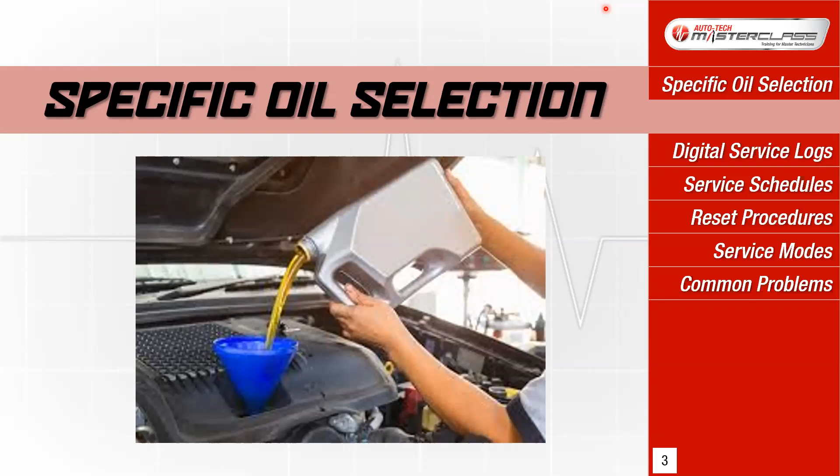Let's get cracking. In this webinar, we're covering two topics. The first one is specific oil selection. As we all know, that old adage we all grew up with on TV commercials - oils ain't oils. We'll explain why one oil does not do every vehicle anymore. We'll discuss all the different standards, classifications and specifications, and also the future of oil technology. Things are changing in regards to the base stock, the key ingredient used to make engine oil. After that, we're going to discuss the other new trend some of us may have seen already - the inception of the digital service logbook.

On a lot of cars now, and more so in the future, no more service book in the glove box to stamp and fill out when we've completed the service. Now the logbook is theoretically stored on a database at the manufacturer. So what can we do about the digital logbook? Us private workshops, can we fill them out? What is the procedure to do so? Things like that will help you out there as well.

All right, so let's get cracking and let's look at the first topic, specific oil selection. Why are there so many different oil specifications out there nowadays? Let's have a good look at this. The first thing I want to clarify for you guys are two popular terms that we commonly see when we're going to a lube guide to work out what type of oil we're putting in this car today.

What we normally see on the lube guide is firstly the recommended oil. This is the oil that the vehicle manufacturer is recommending for us to put in that engine. As technicians, we would safely assume that if the manufacturer is recommending that specification, that viscosity oil, this must be the right oil for the engine to perform at its peak performance, kick out clean emissions, give good fuel consumption figures.

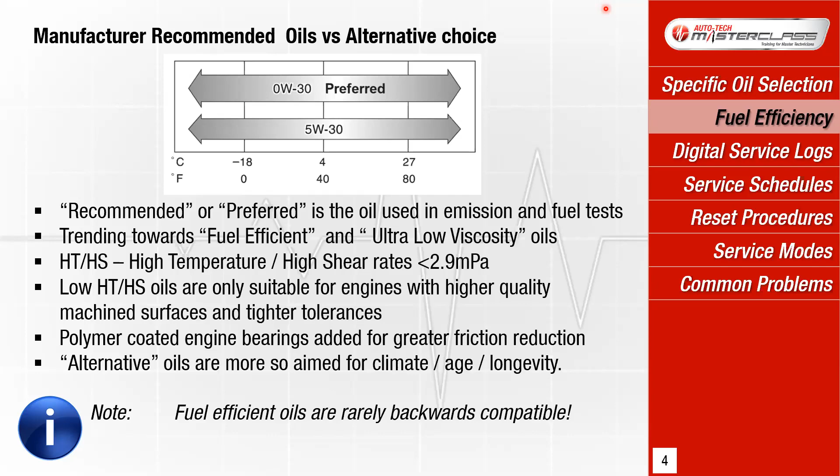Now, who actually controls oil around the world? Well, there is a committee that's in charge of this, and they are the EOLCS, the Engine Oil Licensing and Certification System. The good thing of having a committee controlling all the worldwide standards, and even the new trend, the ever-emerging manufacturer-specific oil standards, is they test every oil standard around the world, and they test them all the same way with the standard test.

The good thing about testing them the same way is it enables everyone to clearly see the comparative differences between all the standards of oil. Now, this was highlighted more so many years ago when manufacturers and technicians around the world discovered that a particular oil is good as a standard for particular areas around the world. But when that oil is specified for the same car in another country, due to different driving styles, driving conditions, and different ambient temperatures, that international spec oil actually doesn't do the right job in regards to engine protection where the climate is different from the original country.

So that's why the EOLCS was developed, in order to see if that oil standard, which is good for one continent, is okay for another continent. And if not, manufacturers had to adjust accordingly, so things work the way they should. It's a very good thing. So it keeps oil makers under control, keeps some standards in check, and it makes life a whole lot easier for us to compare one classification of oil against another, to ensure that we're actually putting the right oil in that car at every service.

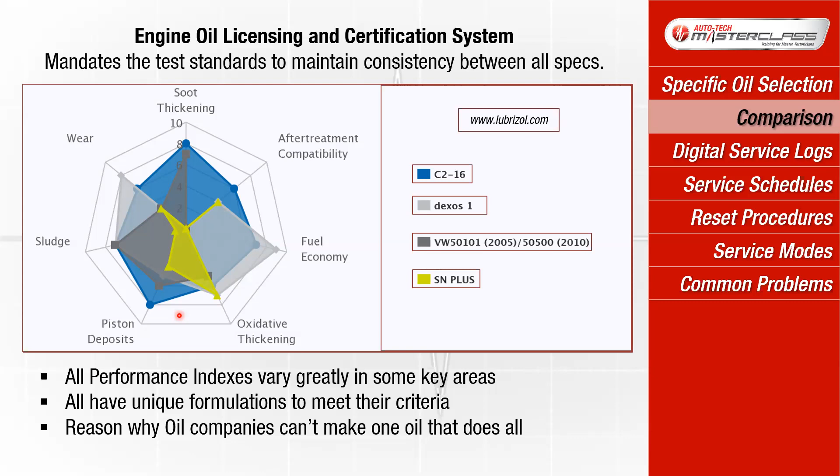All right, now let's have a look at all the different international oil standards around the world and the governing standards as well. I think the most important thing, as far as we're concerned in regards to engine oils, are the viscosity ratings. As we know, there's the two numbers, the low temperature and the high temperature rate.

So firstly, let's look at who created the standard, and that was the good old Society of Automotive Engineers. Many, many years ago they created the standards of engine oil viscosity. Basically, they create a certain thickness of oil and then they label it - this is a 0W, and then they make another batch of oil and say this is a 10W, this is a 20, this is a 40, and so forth.

By creating this standard, everyone that makes engine oil cannot deviate from these viscosity specifications. So it stops anyone out there from making a different oil which might be thinner or thicker, but then calling it their version of a 0W. So all viscosity is the same, no matter what label or brand it is on the bottle. So that's good, keeps everyone in check, makes our life just a little bit easier.

What they also dictated are the allowable viscosity grades for both low and high temperatures. So firstly, let's look at that first number, the low temperature viscosity grades, where the SAE mandated that you can't go any thinner than 0, and you can go up in 5 increments all the way up to 25W. That's the first number. The second number is the high temperature viscosity grades, where they say you start at a minimum of 20, going up in increments of 10 all the way up to 60.

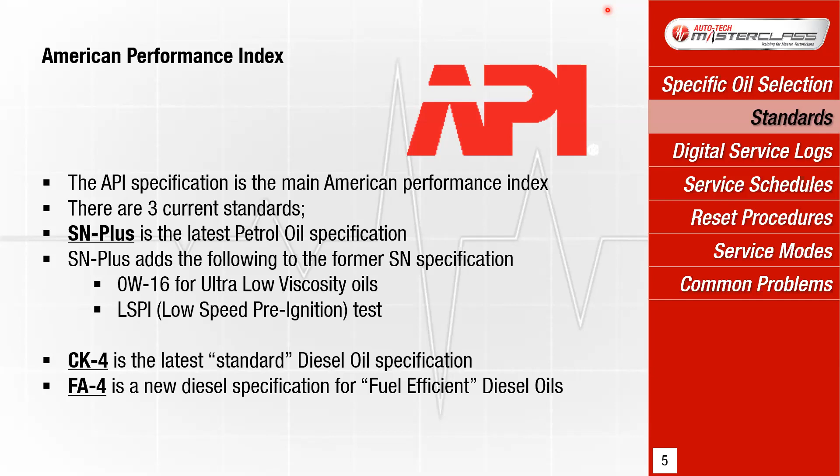You wouldn't be putting FA4 in a pre-1990 diesel. It's just way too thin. It's just not going to work on that type of engine. And the formulation, there'll be some key ingredients that might be lacking, which makes it not suitable for the older stuff.

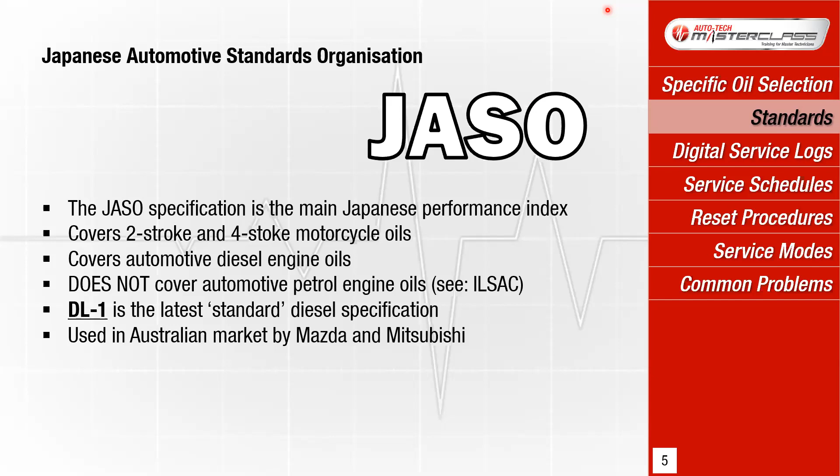All right, let's move over to Japan, where Japan had been using JASO as their performance index for many years, but not so much nowadays. Nowadays, JASO, which is just for Japanese diesels, not Japanese petrol engines, is now only a performance index specified by Mazda and Mitsubishi. The other Japanese car makers have moved over to another well-known performance index. So for Mazda and Mitsubishi currently, DL1 is normally the recommended performance index on a lot of their diesel vehicles that you need to abide by when choosing an oil for them. So not many manufacturers use JASO as their benchmark anymore.

Now let's move over to ILSAC. ILSAC came out back in 1998. I remember being a technician back then, and all this talk came out: here's a new oil grade, this is what it's all about. Basically, what ILSAC is and why it was developed - it's a joint collaboration between the Japanese and American car industries.

Because what was happening in the 80s and early 90s, especially with a lot of Japanese imported vehicles going into the American market - because the Japanese had one performance index and the Americans had their own performance index - some technicians didn't look at the classifications or their lube guides too well, and they were putting American spec oil in Japanese cars. It wasn't suitable. It was causing a lot of Japanese vehicle engine problems, customer dissatisfaction, warranty claims on those brands, and it really hurt sales. To a certain effect it was happening the other way around too, because some American cars ended up on Japanese roads as well, and Japanese techs were doing the same thing, putting the wrong oil in.

So they got together and said, can we have a blanket petrol engine standard - ILSAC is only for petrol - that works for both of us and prevents any more confusion? So that's what they did, and that's why ILSAC was created. The latest ILSAC petrol oil specification is GF5, a very popular spec, recommended by a lot of manufacturers, especially GM cars that we've seen over here in Australia.

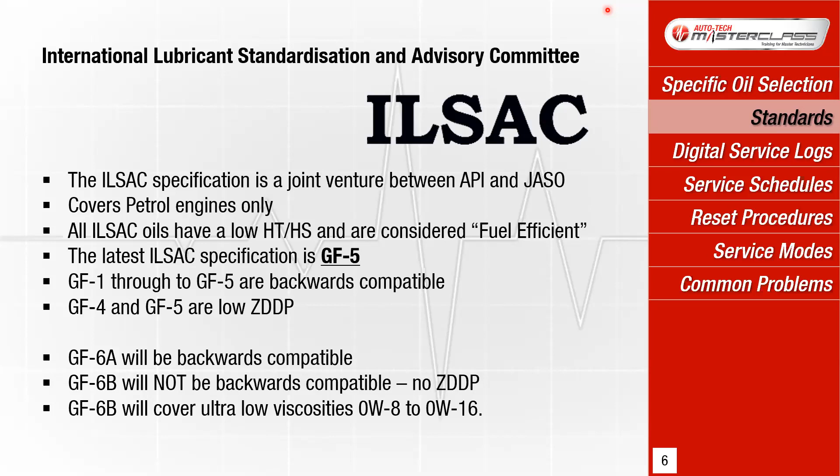The other different thing about 6B is it's also going to encompass ultra low viscosity oil, 0W4, 0W8, 0W16, all those sort of things. So everything running GF6B onwards will definitely have a roller valve train in that area, because there is no zinc left. So that's happening very soon, this change. You'll start seeing it very shortly in your workshops and your lube guides.

All right, let's move over to ACEA. This is an oil specification that originated from Europe and has been highly regarded and used over there by many European car makers, and now some Japanese car makers as well.

If they're not using ILSAC and they've moved away from JASO, they're using ACEA as their benchmark. Now, we've used ACEA oils a lot already, I can presume, via manufacturer cars that this spec covers. And we've always seen these letters and numbers after the ACEA oil grade. So what do these mean? Well, it breaks the ACEA oils into four different groups.

So if you see it's an ACEA A engine, that is a petrol engine oil, older petrol engine oil. ACEA B oils are for light duty diesel engines pre-DPF. ACEA C oils are for petrol and diesel engines with a catalytic converter, so 1986 onwards, and a diesel engine with a DPF, so it's a lower ash oil, which these devices mandate.

E is for heavy duty diesel engines, so for truck engines. But in saying that, it's also Isuzu D-Max, it's an ACEA E oil they recommend. Why? Because Isuzu make trucks, and they just carried over their truck oil viscosity knowledge over to their light commercial ute as well, and it is DPF compatible at this stage. So that's what the letters mean, breaks it down into four groups, tells us exactly what type of engines it's suitable for.

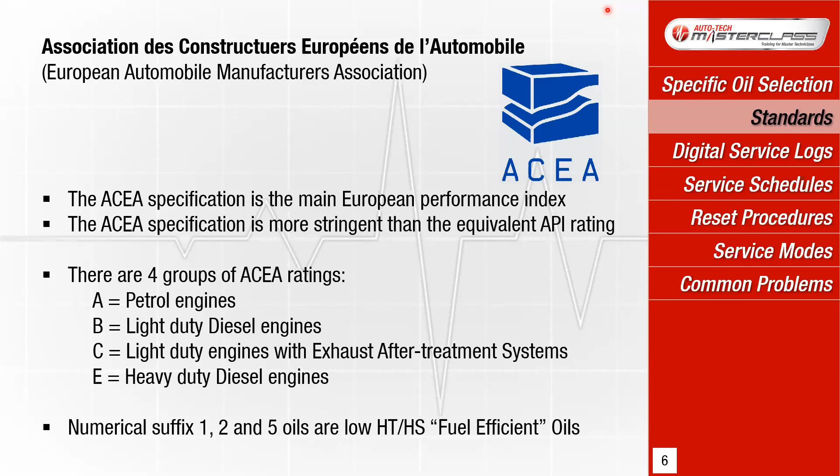So if it's not a 1, 2, or 5 oil grade, then it's a slightly thicker viscosity, mainly for the older vehicles out there. That's one quick rule of thumb that you can use in this particular area.

Okay, so that's the international standards that we've seen in use, where they've originated from, and what is the current standard out there. But what we've seen, guys, is various car makers move away from those international standards and create an oil classification of their own, manufacturer-specific oil specifications. Why are they doing that? I'll explain very shortly. These manufacturers, like Volkswagen over the years, GM when they brought out Dexos, Ford's doing it, other manufacturers are doing it. If not, they're going to do it for sure.

Basically, they look at the engine oil classifications available out there, all those international ones, and they look at the formulation and they say, yep, it's not bad, it's close, but it's not perfect. It's not ideal for our engines because of the metals we use, the anti-frictional coatings, the plastics inside the engines as well. That's important nowadays. We want a different chemical, a slightly different formulation from what is currently out there.

So what they do is go to the oil manufacturer that they use and say, yep, we like this particular grade of oil, but can you add a bit of this and reduce a bit of that in the formulation? So it's a custom oil blend that the manufacturer wants. Now the oil maker would be obliging because they get the business from that car maker. So they will play around with things, add some ingredients, take some ingredients out, and now it's a slightly different oil, this custom blend. And because it's slightly different from one of these international specs currently out there, the manufacturer gives it their own manufacturer-specified classification. So yes, that's where it comes from.

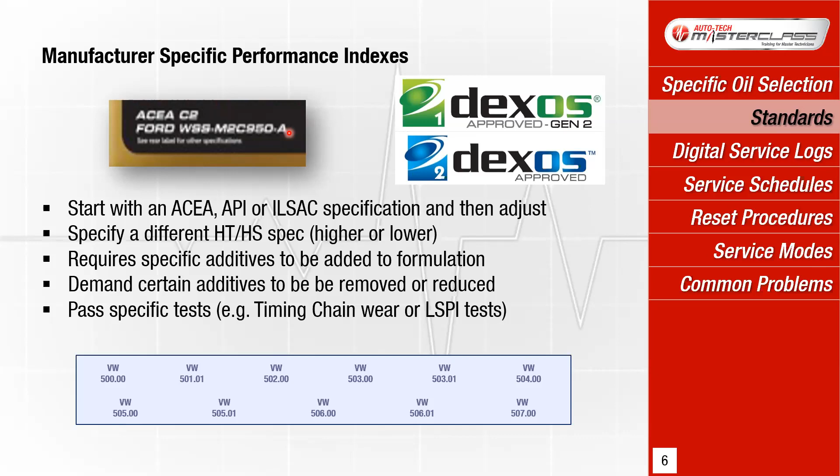What the manufacturer also wants, and the reason why they want specific additives added or removed, is because they're worried about timing chain life. So they might want some key ingredients added to make that timing chain last a little bit longer. And also for some other wear tests, such as LSPI, low speed pre-ignition - does it stop that? Add or take some chemicals out for that as well, which I'll talk about very shortly. So that's why we're starting to see the emergence of manufacturer-specific oil. It's the perfect oil blend to suit their engines for what they want it to do, and help this engine last the warranty period at the end of the day.

So let's talk about something I've been harping on a little bit, low-speed pre-ignition. This turned out to be a very big problem for today's high-tech petrol engines. It started rearing its head in the late 2000s, about 2008, 2009. That's when we started seeing more and more downsized efficiency engines - small petrol engines, small capacity, 3 or 4-cylinder engines with direct petrol injection and supercharging on top, whether it's a supercharger or turbocharger, forced induction system I should say. So highly stressed engines, and you've probably seen them over the years.

Volkswagen was very notorious for this. A lot of these engines very early in the piece were basically blowing up, exploding. So failed engines going back to the manufacturer or back to our workshops, and normally piston failure was discovered when they dismantled the engines - broken ring lands, broken piston rings, cracked pistons as well. All these things were surfacing. So because it was happening a lot, and a lot of unhappy customers, a lot of warranty claims, fights in the courts, things like that, car makers had to sort of work out what the hell was going on here. We designed this engine, it should be right, but things are going wrong.

So firstly, car makers were blaming car owners for not using the right octane fuel, which could be valid to a certain extent. But when they went back and did further testing of these engines, they realized there was another problem occurring: low speed pre-ignition.

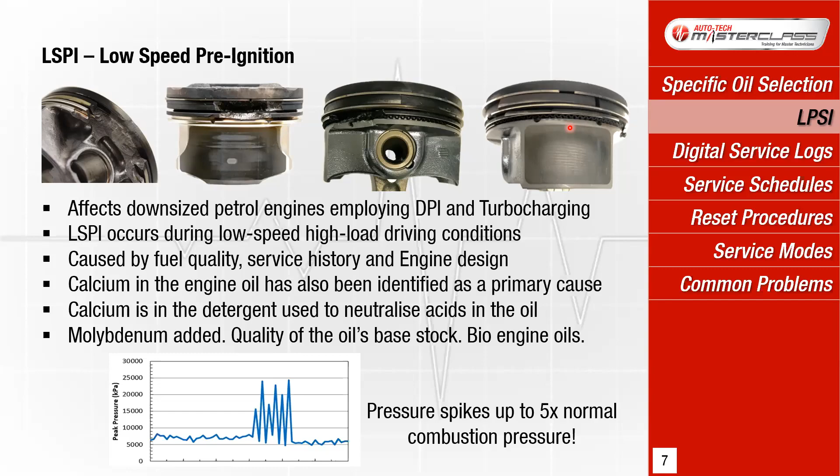All right, so that's enough about specific oil selection. Hopefully that explains a few things, a few questions you may have had about why there are so many different oils, why there are so many different grades. Hopefully that's a whole lot clearer for you guys.

Okay, so now let's move on to the digital service logbook. You may have come across this already - a customer drops off the car, and what we normally do is go to the car with the job card, write down the mileage off the odometer, and reach in that glove box to get the book.

And now there's going to be even more reasons why that book is missing sometimes, because nowadays some cars didn't come out with a book, plain and simple. Manufacturers have worked out over the years to save paper, save the forests, save manufacturing costs and printing. Let's just do away with the service book.

And now the service history we'll just keep on our database at the main office, where the dealerships can just plug in, connect to the database and fill it in when they do a service. And that's where it's trending. Some manufacturers are already doing it in Australia, has been done overseas for quite a few years already, and there's going to be more and more manufacturers going to the digital logbook.

So let's look at the history and the inception of the digital logbook. Believe it or not, the first manufacturer to give it a go was Mazda back in 2006 when they brought out their digital service record, no more book in the car. At this time and at this date, not in Australian vehicles yet.

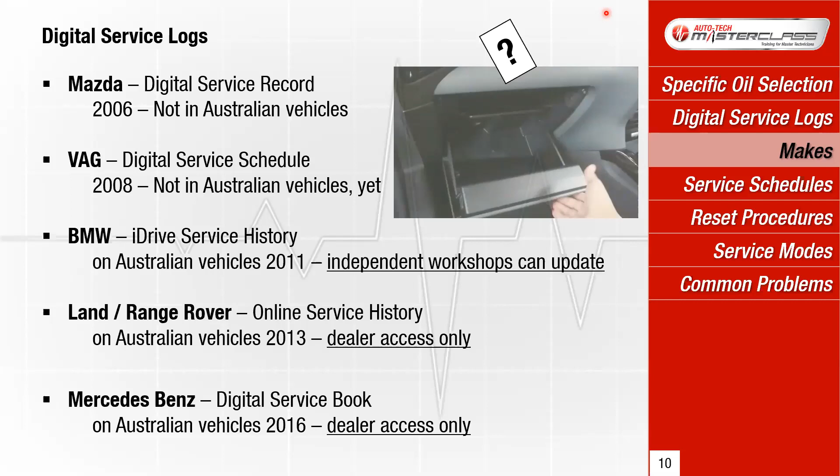So what do us technicians do in the private workshop land when it comes to providing some sort of authentication or proof of service for our customers if we're not in the dealership? Well, let's look at one brand, because there is one brand that we currently do have access with in Australia. One brand has let us in, which is great, and that is BMW, their iDrive service history, where independent workshops can access this database. Not every brand is letting us in yet because we haven't got those freedom of information laws that other continents do around the world.

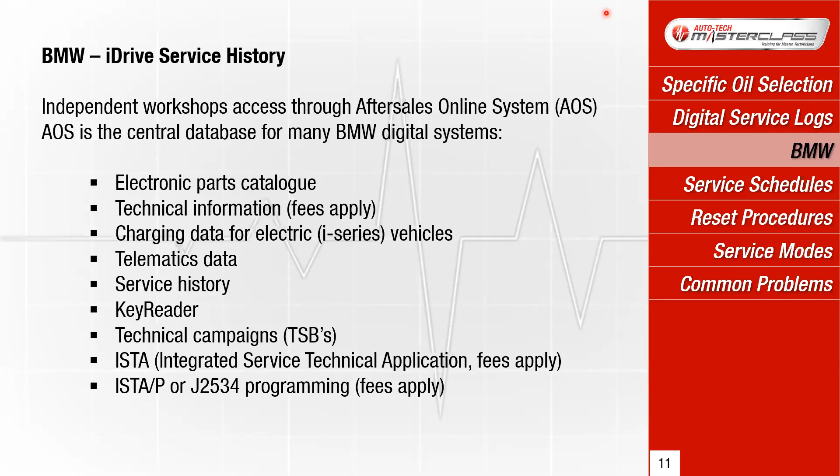So what do you need to do? You have to go to the BMW AOS website, which is the after sales online system. And here it is here, guys.

Now, the good thing is, guys, this is free. We don't have to pay any money to a certain extent. But if you've never done it, this is what you do.

Step one, if you just serviced the BMW and it's got iDrive service history and you want to fill it out, the first thing you need to do is become a BMW service agent. Now, it's no big title or anything, basically you have to go on the AOS website. Here's the BMW AOS website. And not only BMW, but all the brands that fly under the BMW banner nowadays, like Mini and Rolls-Royce and their motorcycles as well. So here's the homepage for the AOS.

Go on there and click on here and just enroll yourself as a registered service agent. So you go in there, what country you're in, business name, ABN number, proof of business ownership, so your business certificate, your ASIC form to show that you're a business owner and a trader and things like that. Phone number, email address, website if you got it, all that stuff. Fill that all out, submit it.

Costs nothing, guys, it's free, just a bit of time. And within 48 hours, BMW get back to you and say yes, congratulations, here's your BMW service agent number. So everyone gets their own agent number. Sometimes they might not let you in straight away, they might want some extra supporting information, but keep doing it. It's free, and now you've got your own service agent number.

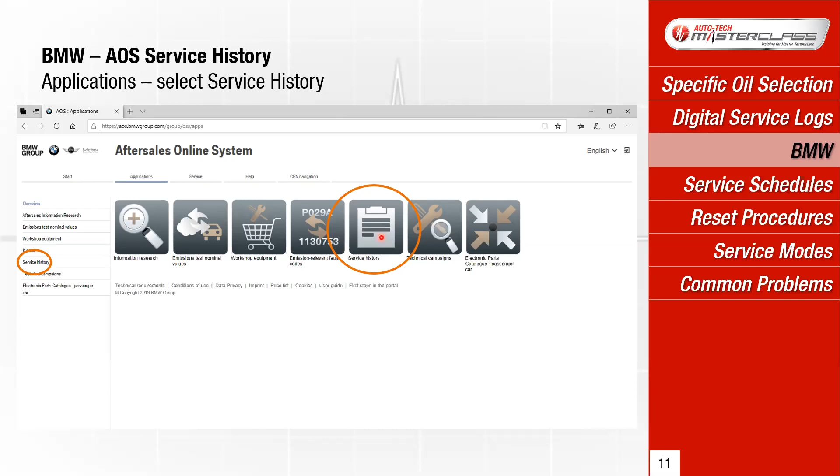Once you're in, you can start looking at the service history and filling in the logbook, which is great. So when it comes to service history, click on the next page, service and service history, click on there. And here's an example, what we've got here, we've got a 2011 BMW 520D.

So let's say your customer came in and you wanted to see what is the service history, what has been done, what hasn't been done on this car in the past. First time customer maybe. So now you're registered, you're in, punch in the VIN number there and bang, the car comes up if it has got a service history recorded to it. So on this particular vehicle, this 520D, we can see here is the digital logbook. Here's the service history showing the date, the mileage, and who serviced this vehicle. And as you can see, it was done by BMW dealers in Melbourne before coming to us. So that is the digital logbook, so to speak.

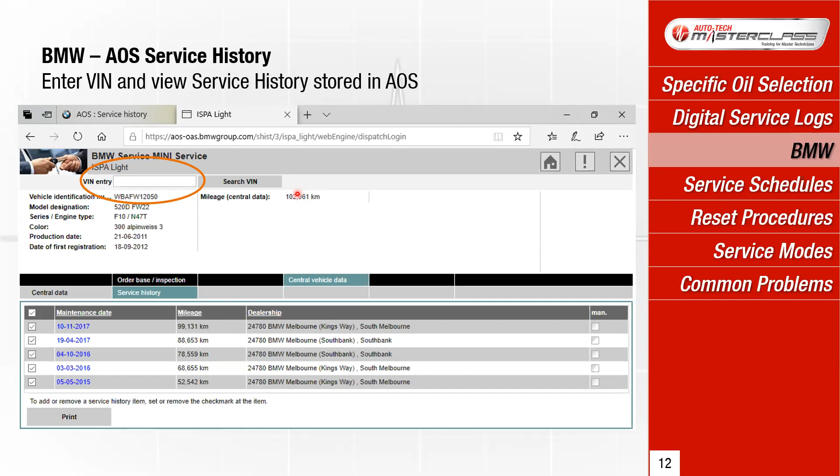Now, if you want to see what was actually done on those services, you click on them and it tells us everything. What's interesting, last time the vehicle was at a dealership or recorded or hooked up to AOS was 102,000, so it was after that service. Went in for wiper blades, went in for a recall, went in for brake pads, who knows, but it wasn't a service, that's why it's not there. But BMW will have that information on a different database.

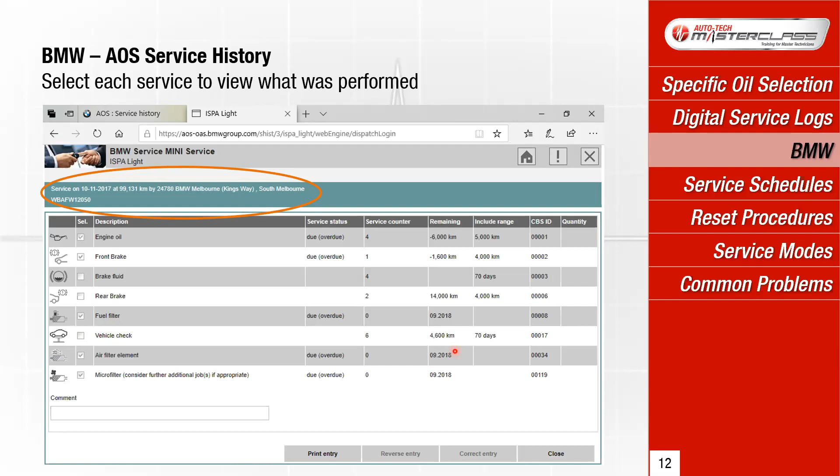All right, so if you want to see exactly what was done, you click on one service at a time and view it, and what has been ticked is basically what was done. And you can see on that last service at 99,000 Ks that this dealer did, they did the oil, they did the front brake pads, they did the fuel filter, air filter, and the cabin filter. What was the status of it when it came in? Was it due, overdue? How much over was it, or how much was left before it was actually serviced? All that sort of stuff. So we can see a whole lot about the history there. And so you can look at them one by one and ascertain the service history.

And that is the AOS database. Once again, you've looked at all that, you've worked that all out, you haven't paid a cent yet, just a bit of time going on that internet site.

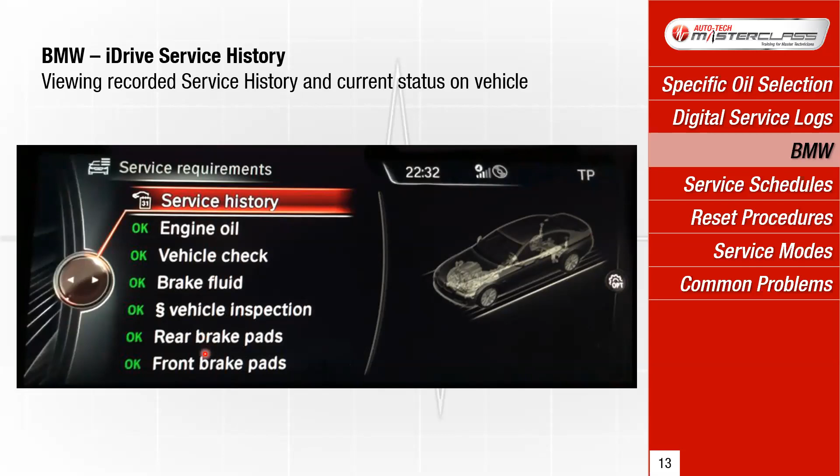But what you can also see, if you click on that, you can also see the service history. So this is a different BMW vehicle, and yes, the service history has been downloaded to the vehicle as well, not only on AOS, but on the car as well, showing the date and mileage.

The service agent - the fact that it says BMW here means it was a BMW dealer. If it was a private workshop, it just says 'other.' Sometimes it depends how you filled it out, or when in time you logged into AOS and became a service agent, it may show your business name as well. They keep changing what gets displayed there.

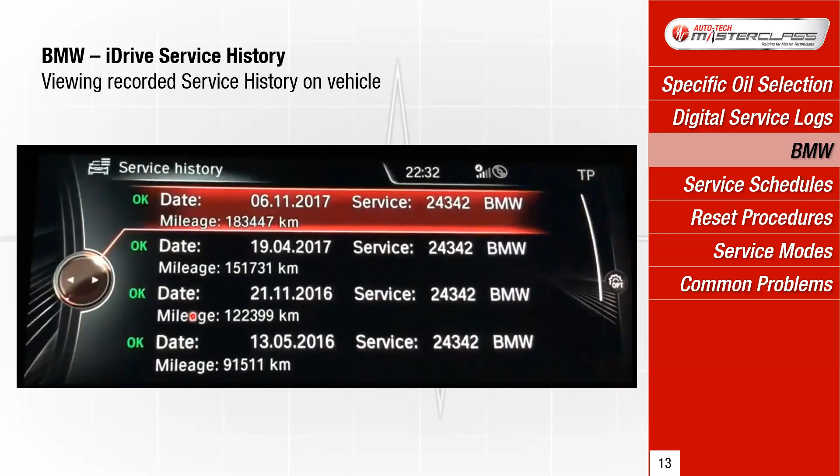Once again, if you want to see what's actually done on these services, if you're just looking at it via iDrive, you click on each service one by one, and you can see the things that were done on that vehicle last time it was in.

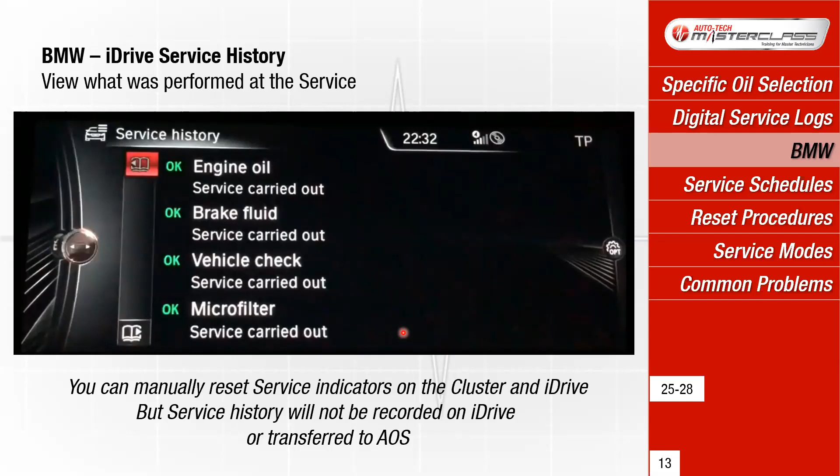I'll stress, I've already said a few times, sometimes you will see this on iDrive. It will definitely be on the AOS website if it has been recorded by the previous service agent - you just go on the website, plug it all in, put down the mileage, and I'll show you how to do that shortly. The only time it's going to be displayed on iDrive inside the vehicle is if the vehicle, after the service, was then hooked up to that internet site. So just like doing a recalibration, you need a J2534 pass-through device, hooking up the car to the internet, to the website via the data link connector, and then transferring whatever was on the AOS website into the iDrive of the vehicle. Not everyone's going to do this final step, because it costs you money to do, and you need a pass-through device to hook up to the car. But it will definitely be on AOS - that doesn't take much to do.

So how do you fill in the digital logbook? Let's start by putting the information on the AOS website. So you finish the service, you've got the mileage, you know what you've done, what you've replaced, what you haven't done. Log into AOS using your registered business number that they've given you, your service agent number, punch in the VIN, and then go to service data, upload a new service schedule, and then just tick what you actually did on those services. Tick, tick, put down the mileage, update. It's as simple as that - just a bit of time, hasn't cost you any money, and now you've filled in that digital logbook.

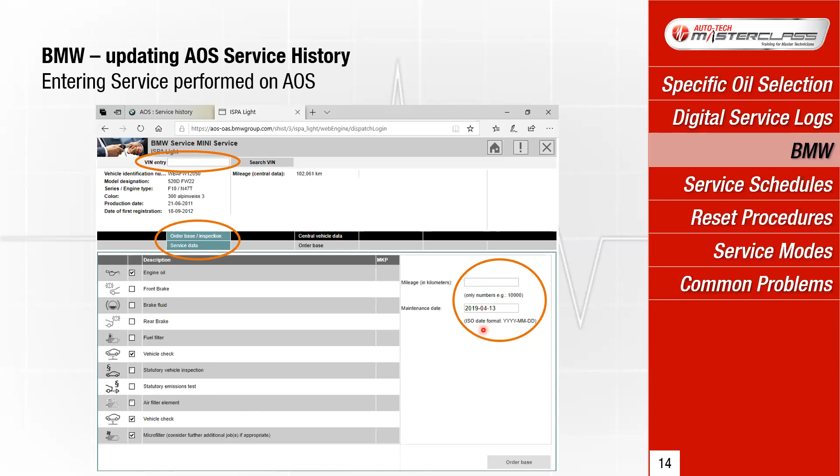BMW are letting us private workshops in. Now, that next step - what if you want to go the whole hog? What if you then want to transfer that and any other previous service history into the iDrive of the vehicle? Well, this is where it starts costing you money.

Firstly, you're going to need a J2534 device, something that can hook up the vehicle via the data link connector to the AOS website - this is the BMW equipment required, called ICOM, and that's going to cost quite a few thousands of dollars. You might have an aftermarket J2534 device which might do the job for you - not all of them will, some do, some won't. You have to make that investment if you want to go this far. Secondly, in order to download from the AOS website into that BMW car, you also have to pay for an ISTA subscription - a monthly or yearly fee, depending how far you want to go, to be able to download from that website.

Whether you're doing a recalibration, you can also get recalibrations from that website, and you have to pay for this. So you're going to be up for a few dollars, and I dare say you've got to work out, is this going to justify the amount of BMWs in the service? Can I on-charge this to the customer? That's why not every car is going to have the iDrive service history completed, but definitely on the AOS.

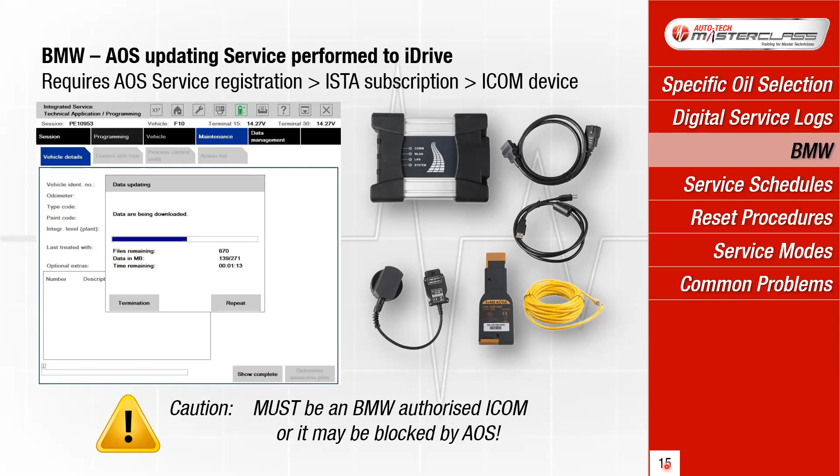The only other way BMW owners can look up their service history is if they have the BMW Connected Drive app installed on their phone. Only the owner can do this because you have to supply proof of ownership. So if a customer wants to help, they can bring their phone, load up the app and show you the service history when they drop off the car. That gives you an idea if you're not prepared to look at the AOS or fill out the logbook yourself.

So I've shown you the BMW procedure because they let us in. But some manufacturers, Mercedes, Jaguar Land Rover, and others, are not allowing private workshops into the service data bank. Even if you wanted to do the right thing, they're not letting you in because you're not at a dealership. They can still do this in Australia because the right to repair campaign, the AAAA movement, hasn't passed through yet. That's causing a bit of a stink with some customers. It's also bordering on ACCC legislation because it has a slight hint of dealer exclusivity, which they're not allowed to promote.